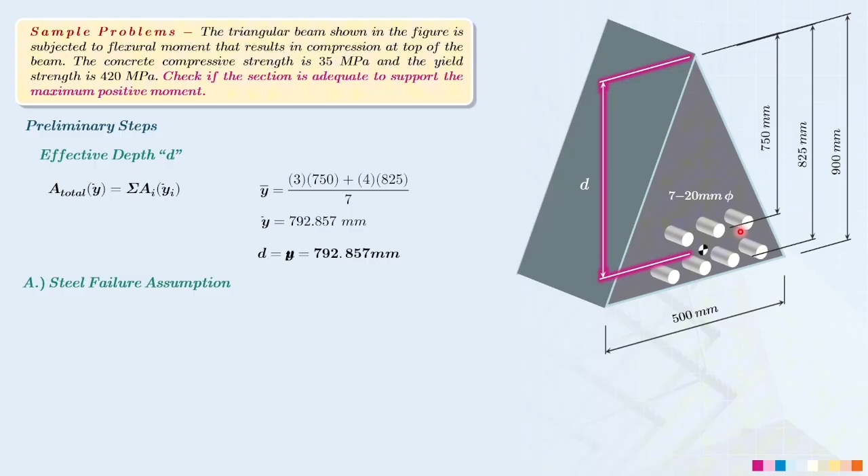So yung ating yield strength here is equal to 420 megapascal, which is we need to determine the value for our beta 1 or the stress block factor coming from this table sa ating NSCP provision. So of course, yung ating beta 1, this is dependent on the value of our f'c. But our f'c here is 35 megapascal. That's why we will use the second formula. So para makuha natin yung exact value ng ating beta 1, we need to substitute here our 35 megapascal so that our beta 1 here is now equal to 0.8.

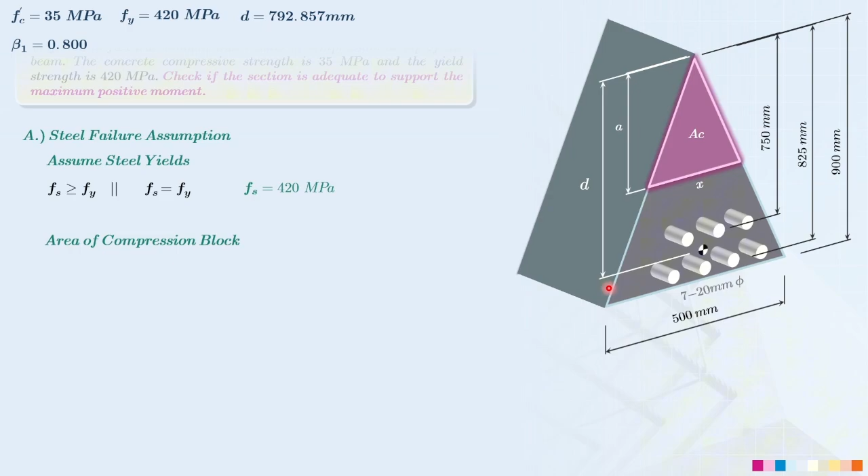Basically, the area of a triangle, this is equal to 1/2 base times height. Kaso, kailangan i-relate natin dito yung value ng ating a sa kanyang base. So technically speaking, on this figure, malalaman natin yung area of compression block based on the depth of our a on this formula. So what we have here is 1/2 times x times a. Na kung saan yung x natin, this is the equivalent base for our a. Okay? Kaso, kailangan lahat sila ay maging in terms of a. So what we need to do here, we can perform similar triangle.

So since ratio lang naman or magkaka-ratio lang naman yung ating size ng ating triangles here, so why not to perform similar triangle? So recall lang tayo for our similar triangle which is on this one. So ibig sabihin lang nito, ratio ng base and height ng isang triangle can be equal to the ratio of the base and height of the outer sides of our triangle.

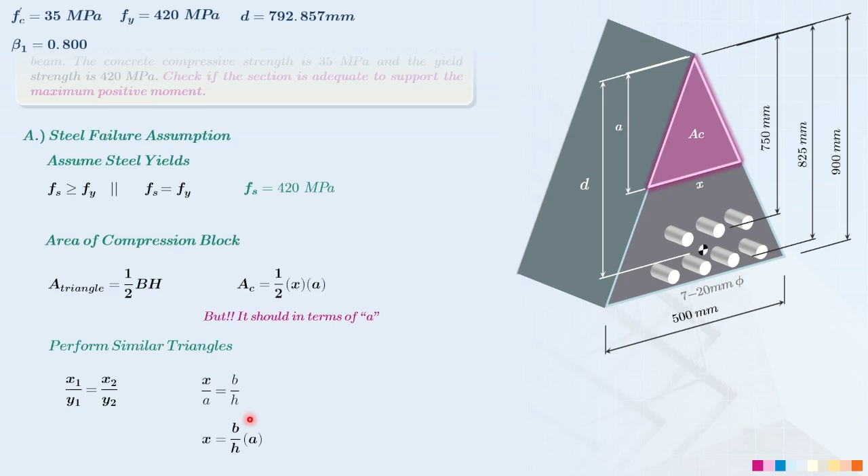So substitute lang natin based on this condition which is this one. So malalaman natin na yung x natin ay pwede siya mag-equal to the base of our main triangle which is 500 mm and sa ating height which is 900 mm. Of course, multiplied by our a. So why not to simply substitute yung ating base over height? Okay, which is this one, no? So yung x natin dito, based on this formula, so direct substitute lang natin.

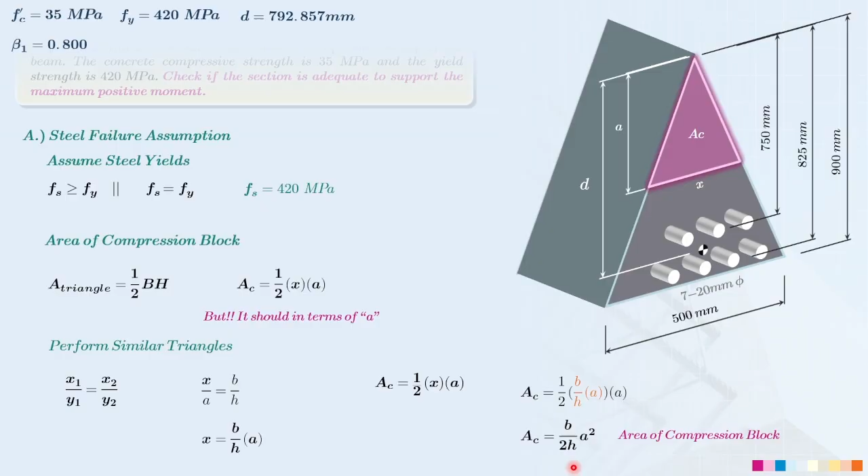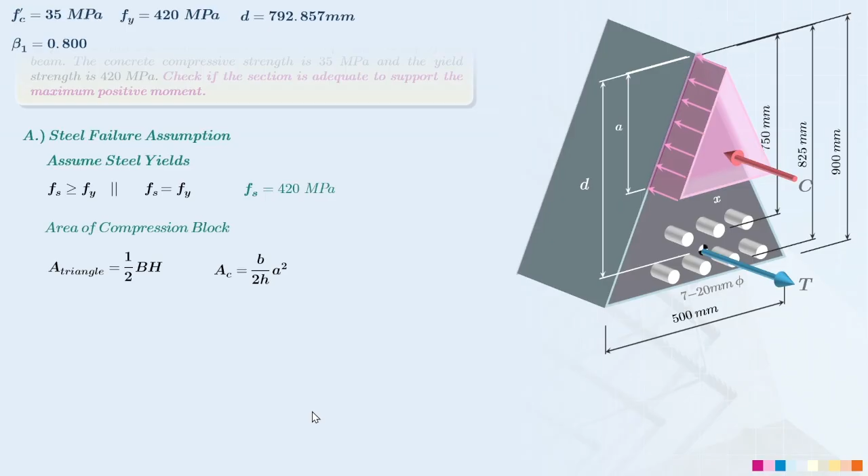So ang makukuha natin ditong area of compression block is now equal to b or base of the triangle over 2 times of the height multiplied by a squared. Okay? So yun na po yung magiging area of the compression block. Kasi ang next na gagawin natin dito, class, is we need to determine the neutral axis based on yield assumption or yung value ng ating c. Okay? So which is based on the equilibrium condition.

Kaya lang kasi, class, kung ito ang gagamitin mo, hindi pa pwede yan. Kasi yan ay applicable sa rectangular sections. So we need to use a more general formula which is this one. So which is yung ating a times b galing sa ating rectangular section. Actually, this is the area of compression. Kaya lang kasi, class, yung area of compression natin ay nasa shape of a triangle. That's why you need to substitute yung na-derive nating area of compression block kanina.

Okay, so ibig sabihin lang nito, ito na po yung magiging itsura ng ating equilibrium compatibility if the given is a triangle. So you can use this already if the given is a triangle. So let's try to substitute everything sa ating given. So we have here 0.85 multiplied by our f'c and then the base here which is 500 millimeter over 2 times the height which is 900 millimeter. a squared, yan yung hinahanap natin so far.

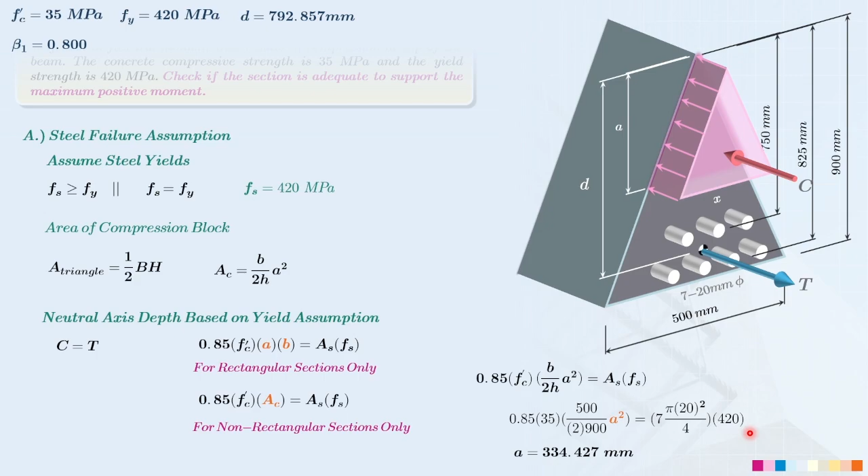Then this is equal to the 7 pieces of 20 millimeter diameter of reinforcement. Of course, inassume natin dito na mag-yield siya so that our rebar strength is 420 megapascal. So ang makukuha nating value of a is now equal to 334.427 millimeters. So ibig sabihin lang po niyan, we need to confirm if this is a legitimate value based on this assumption.

So ang pwede natin makuha dito is the value of c, which is by simply substituting based on our beta 1. So our value of c here or the neutral axis depth is now equal to 418.033 millimeter. Kasi yan yung gagamitin natin para i-check natin yung assumption dito, no? So which is we need to determine based on the rebar strength.

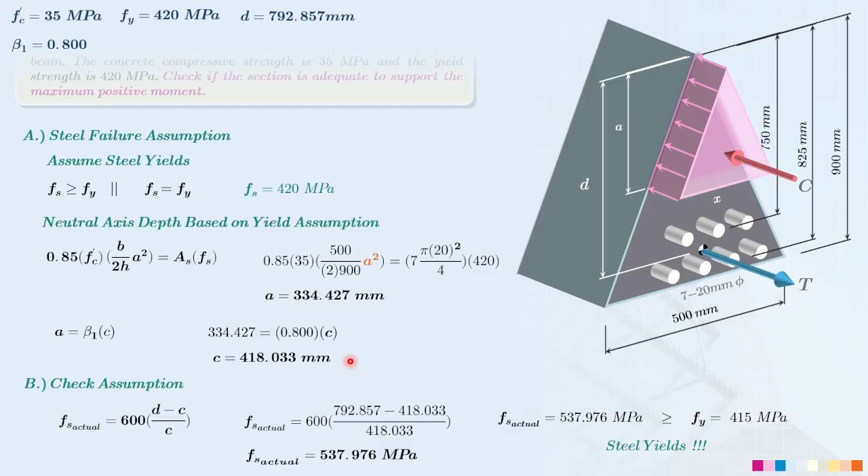Okay? So substitute lang natin since meron tayo ditong effective depth and yung nakuha natin ditong neutral axis depth, ang makukuha natin ditong actual rebar strength is now equal to 537.976 megapascal. Which is in comparison with our 420 megapascal, this still yields. Ibig sabihin, tama na yung nakuha nating value ng c, it conforms with our yield assumption. Alright, so na-prove na natin na mag-yield yung ating mga reinforcement.

So ibig sabihin lang nito, we can now determine the strength reduction factor. So obviously, sa ating strength reduction factor, pwede mong gamitin dito para makuha mo yung value is based on the rebar strength. So of course, yung ating rebar strength dito, which is nasa gitna siya ng 400 and 1,000 megapascal, ibig sabihin lang po nito, class, this is transition control. So kung transition control to, class, you will use this formula which is 0.65 plus 0.25 multiplied by the rebar strength minus 400 divided by 1,000 minus 400.

So simply, you direct substitute everything. So ang makukuha natin dito for the reduction factor is now equal to 0.707. Ibig sabihin lang nito, class, magagamit natin to when we determine the ultimate bending moment sa ating beam section.

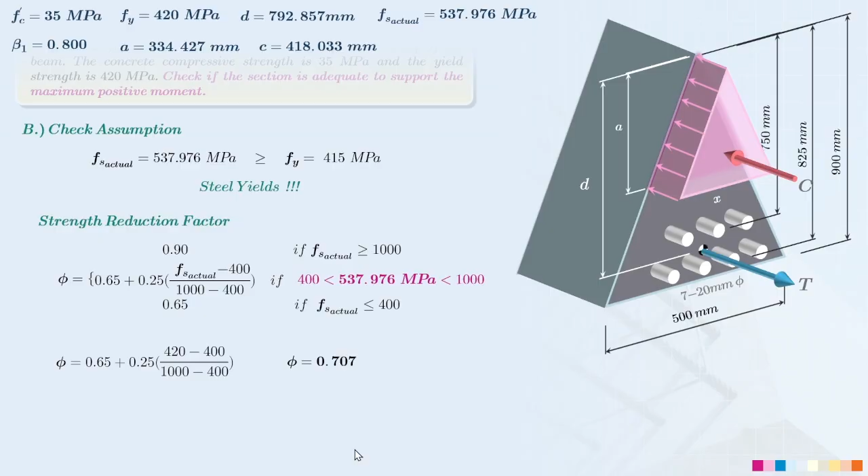Okay, so let's have the flexural strength. So of course, since we are determining the adequacy between the section and the beam, so kailangan muna natin dito makuha yung ultimate flexural strength ng ating beam section. So of course, using the principles under the USD, the nominal strength should be multiplied by the strength reduction factor so that we can determine our ultimate strength.

Okay, so using this formula, para makuha natin dito yung ultimate bending strength, which is by simply multiplying your nominal strength, which is on this formula. By the way, ang ginamit ko na dito ay yung para sa non-rectangular sections, which is ang mamodify lang naman dito is the area of compression and then location of the centroid. Okay? So, by simply substituting everything, ito yung ating formula para sa ating area of compression and as well as yung location ng ating centroid for the actual compression.

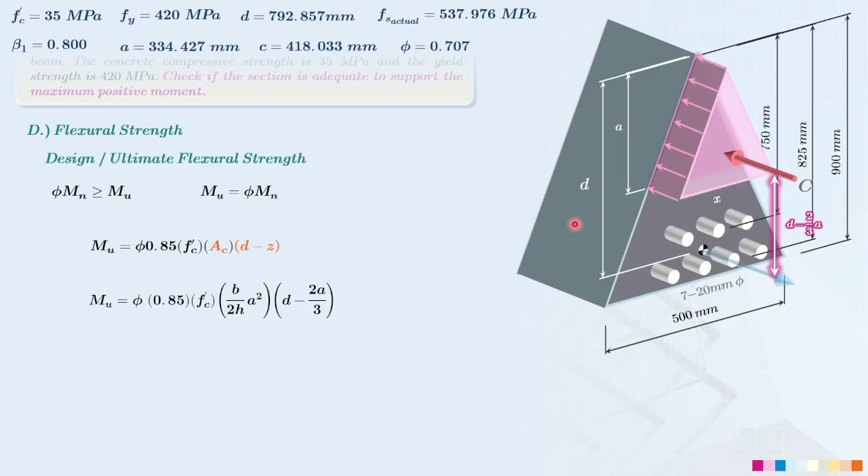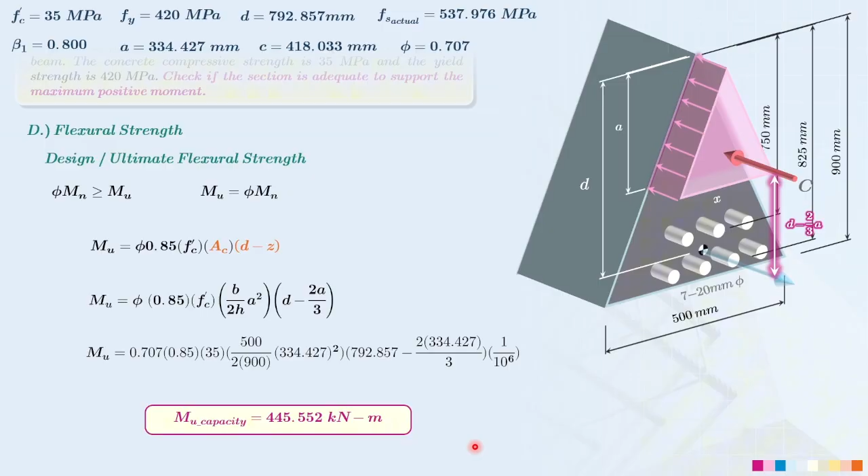So, as you can see here, ang ginamit ko dito is 2/3 kasi yun nga yung location ng centroid para dito sa ating actual compression. Okay? Which is 2/3 of a triangle, especially in height. Okay, so ibig sabihin yung location niya coming dito sa itaas hanggang dito sa portion na ito is 2/3 of the value of A. So let's substitute everything. So makukuha natin dito for the ultimate moment capacity natin is equal to 445.552 kilonewton meter. So ibig sabihin lang yan, class, yan yung magiging comparison natin pagdating natin sa load demand.

Okay? So for our load demand, since given nga tayo dito ng service load, which is a dead load only, para makuha natin yung kanyang ultimate uniform load, we need to use a particular load combination. Please take note na hindi natin dito pwedeng gamitin si 1.2 dead load plus 1.6 live load, kasi nga, kapag may given ka ng dead load and live load. Kaso, ang given lang dito is only dead load so you will use the 1.4 dead load para makuha mo yung ultimate strength. So, of course, this is just simply for a uniform load. Okay? So, 1.4 times 40, so our ultimate uniform load is now equal to 56 kilonewton per meter.

So, para makuha natin dito yung ultimate bending moment sa ating demand load, gagamit lang tayo dito ng mas specific na formula para sa fixed support. And the maximum moment para sa fixed support is uniform load times length squared, over 12. So, ibig sabihin lang nito, kapag kukuha ka ng maximum bending moment, especially kapag ang loading condition mo is uniform load and the supports are fixed ended supports, ito yung gagamitin mong formula. By simply substituting yung mga values natin.

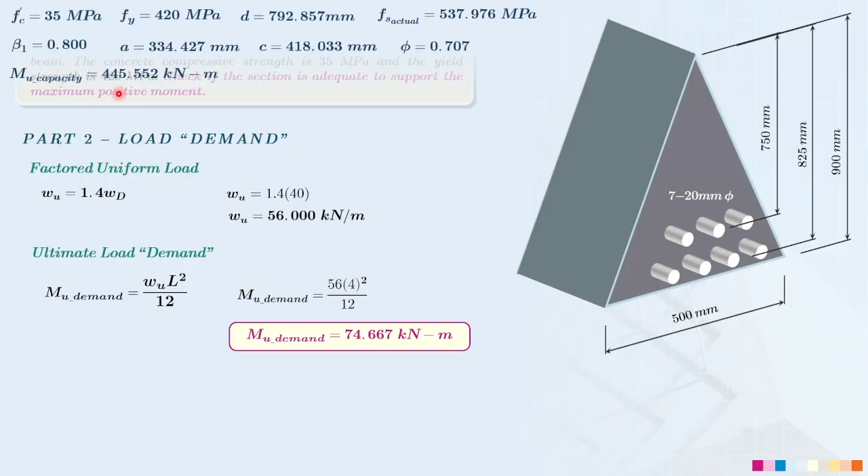So, makukuha mo ngayon dito for our maximum bending moment sa demand loadings natin, this is now equal to 74.667 kilonewton meter. Kaya lang, tayo ay nag-compare. So, ito yung demand ng ating maximum bending moment galing sa load. Kaso sa ating capacity, ang meron lang tayo sa ating triangular section is 445.552 kilonewton meter. So, para at least ma-compare natin yung ating demand and capacity, we need to use here a utilization ratio.

So, using this formula, this is demand over capacity. So, just simply substitute it. Ang makukuha natin for our utilization ratio is now equal to 0.168, which is less than 1. So, ibig sabihin lang nito, class, adequate yung ating section to support our load demand. So yan yung ating analysis for this sample problem.